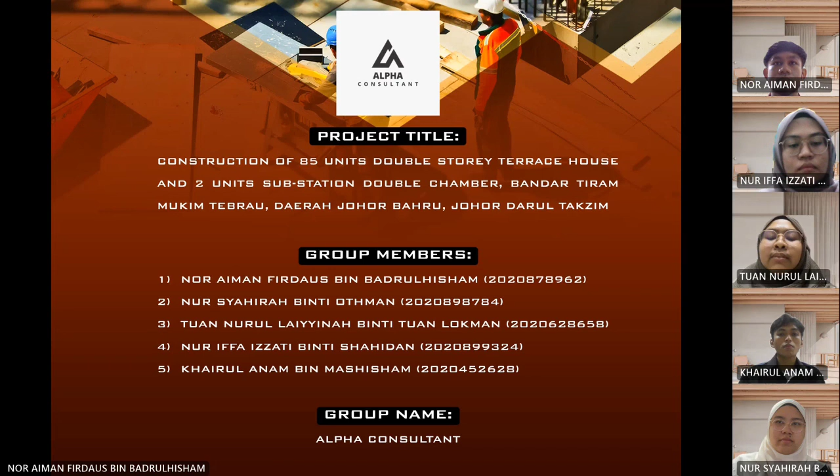Assalamualaikum and very good morning. We start with the project background. This environmental impact assessment is prepared for construction of 85 unit double-story terrace house at Bandar Tiram, Mukim Tebrau, Daerah Johor Bahru, Johor Darul Takzim. The project consists of major components: 2-story terrace house, 2-story semi-detached house, office shop, and water supply.

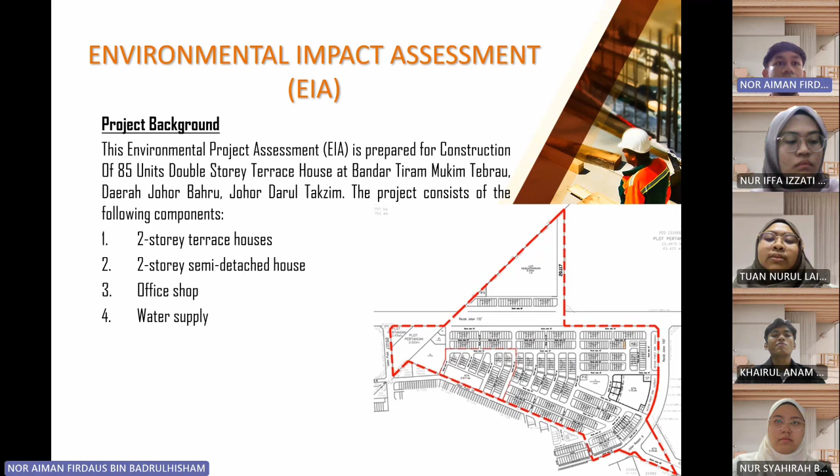The objectives of the project consist of housing solution, space optimization, cost efficiency, structural integrity, aesthetic appeal, functional design, sustainable construction, timely completion, compliance with regulation, and lastly, client satisfaction.

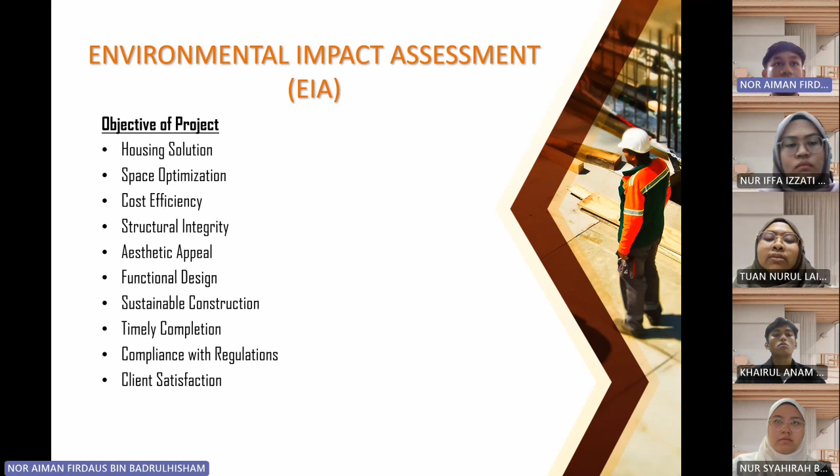For the objectives of the environmental impact assessment: first, to identify the impact of the project on the environment; second, evaluation of significance; third, prediction of cumulative effect; fourth, identification of mitigation measures. Next, consultation and stakeholder engagement, compliance with regulation and standards, monitoring and follow-up, and integration of sustainability principles.

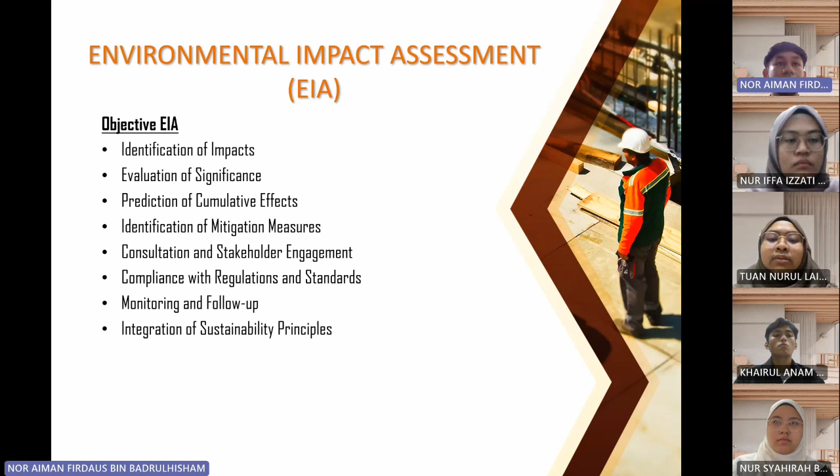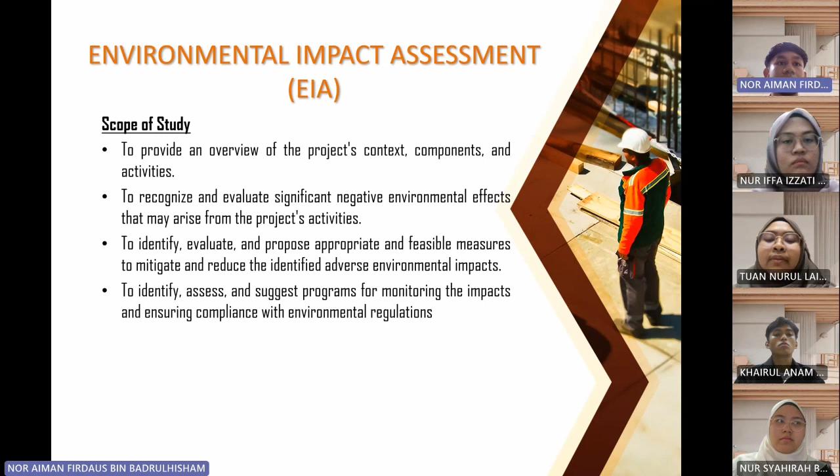We go to scope of study. First, to provide an overview of the project context, components, and activities. To recognize and evaluate significant negative environmental effects that may arise from the project activity. To identify, evaluate, and propose appropriate and feasible measures to mitigate and reduce identified adverse environmental impact. To identify, assess, and suggest a program for monitoring the impact and ensuring compliance with environmental regulation.

For the project details, permanent and temporary structure and infrastructure development: first, access highway will be widened and rehabilitated; second, during construction, a temporary work shelter, toilet, septic tank, project office, and storage room will be built at the project site.

The major components of this project: two-story terrace house, 85 units; two-story semi-detached house, 4 units; 3-story office shop, 129 units; water supply, 3 units; and playground, 1 unit.

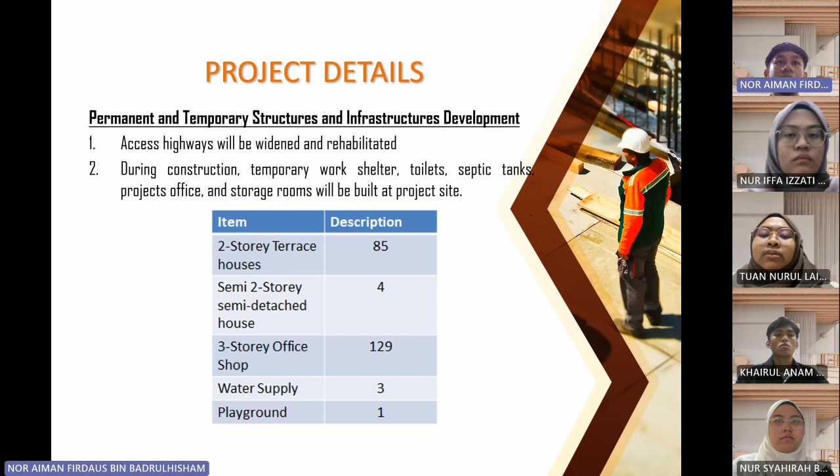For the location of the project, which is at Mukim Tebrau within the Johor Bahru district, approximately 25 km away from Bandar Johor Bahru. The access to the site can be obtained via Jalan Kota Tinggi and Jalan Sungai.

Additionally, when travelling from Kulai to Ulu Tiram, there is an oil palm area located on the left side of the road, approximately 8 km from Ulu Tiram. The local authority involved is the Municipal Council of Johor Bahru.

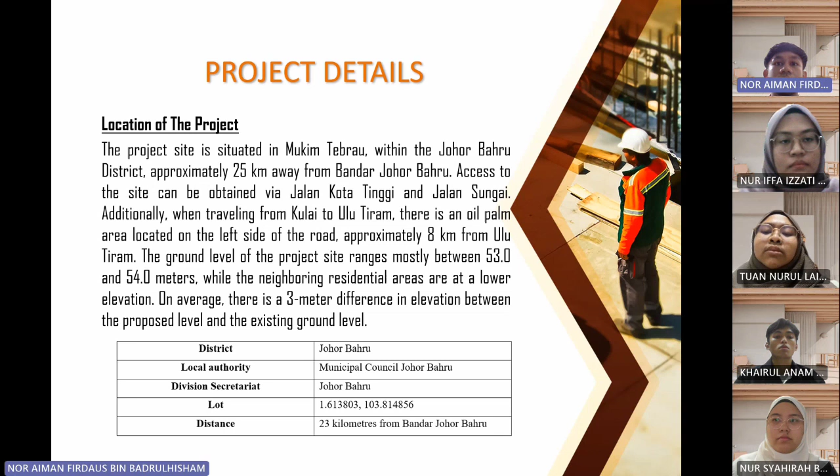We continue to project description by Syahirah. Assalamualaikum warahmatullahi wabarakatuh, and a very good morning to our panel and madam. My name is Nur Syahirah binti Othman. I will continue from Aiman.

This is site accessibility. In the planning of a site, accessibility is a crucial consideration. A good accessibility strategy can help avoid equipment conflicts and ensure seamless transit throughout the project. It can also ensure enough space for all worksite equipment such as trucks, cranes, and excavators to function safely. Conflicts are typically brought about by erroneous estimation of the amount of space taken by facilities and equipment.

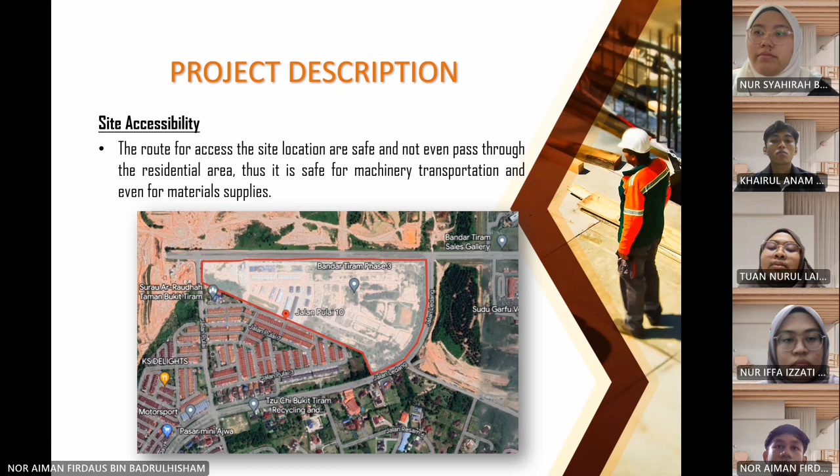As you can see, the roads for accessing the site location are safe and do not even pass through the residential area. So it is safe for machinery transportation and even for material supplies.

Infrastructure and utilities: first, electricity, we have TNB, Tenaga Nasional Berhad. Second, water supply, Ranhill SAJ Sdn Berhad, distributed by Rumah Pam from nearby residential areas. Third, communication, there is Maxis, Celcom, and Digi coverage. Fourth, roads, SDA and residential roads. SDE stands for Senai Desaru Expressway.

Fifth, schools and education institutions, there are a lot of educational buildings within a 5 kilometer radius of the project site. Sixth, mosques and places of worship, it is complete with various religions for all types of races; there are mosques for Islam, and also facilities for Buddhists and Hindus. Lastly, public departments, there are firefighters, police station, polyclinic, and post office.

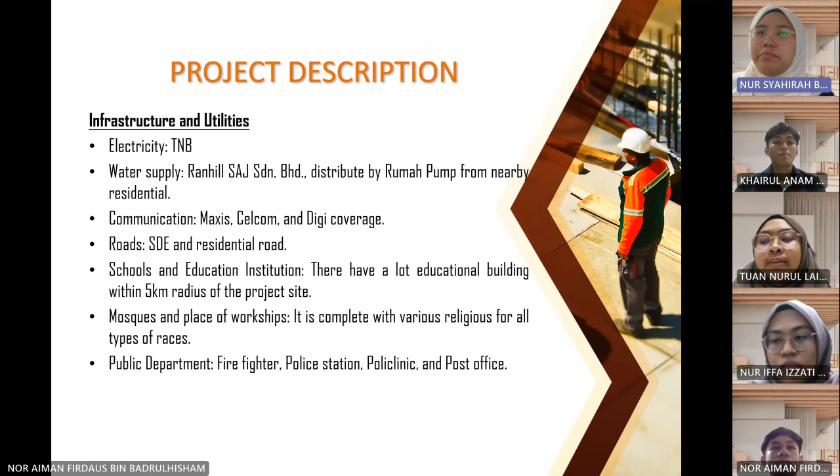Next slide. Project activity phase. There are three phases of activities: first, pre-construction stage; second, construction stage; and third, operational stage.

In pre-construction stage: first, plan preparation and seeking approval from the relevant authorities. Second, appraisal of baseline conditions to determine supply and demand for required infrastructural utility services. Third, EIA project report and study report preparation, including the necessary approval.

In construction stage: first, transportation of machinery; second, transportation of building materials; third, drilling boreholes; fourth, excavation and land filling works; fifth, masonry, concrete work and related activities; and sixth, structural steel works.

In operational stage, there are residential activities, solid waste and wastewater management, compound cleaning, and lastly general repairs and maintenance. All construction inputs have to be obtained from licensed dealers, such as construction tools, machinery, materials, infrastructure elements, and others.

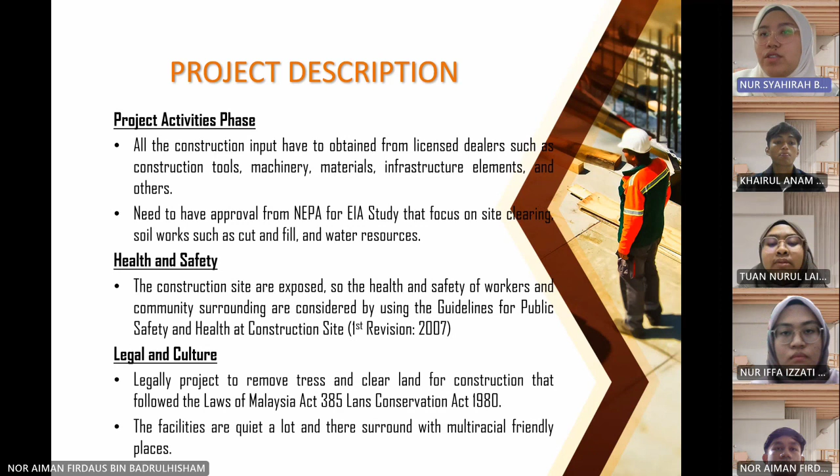Hi, my name is Tuan Nurul Laina. I will continue from Syahirah. For existing environment, there are three factors under environment, which are physical, biological, and socio-economic.

For the first, physical environment: there are some impacts affecting the environment for this project. First is land use and habitat destruction, where clearing is done at each stage and temporary roads and infrastructure are built. Bulldozers, excavators, and trucks are utilized to clear the site. This affects land use through biodiversity loss, fragmentation of habitat, and soil degradation.

Next is temperature and precipitation, where implications include rising temperatures, changing precipitation patterns, and extreme weather occurrences that have the potential to influence ecosystems, water resources, agriculture, and human settlements.

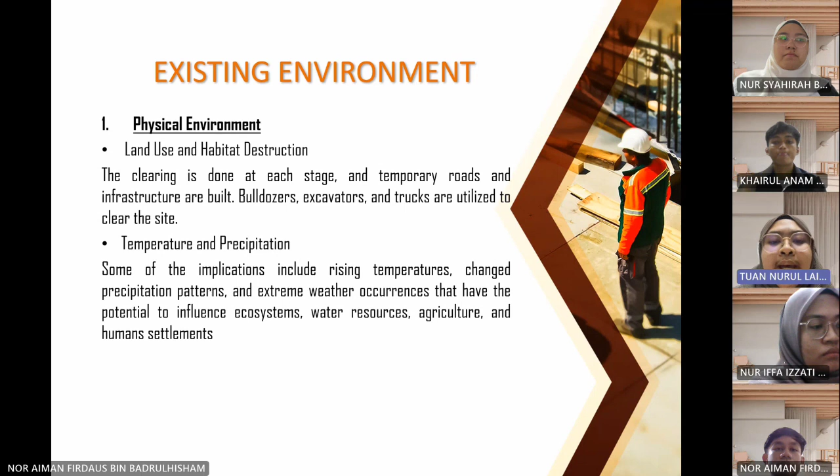Next, for biological environment, there are two impacts: flora and fauna. For flora, there will be vegetation removal within cleared areas for access roads and utility sites, with loss of tree cover, and the function of protecting the soil, particularly on steep terrain, will be lost. For fauna, the majority of birds and mammals are lowland species with moderate conservation significance that are well suited to disturbed rural habitat. Contractors or other involved parties need to consider this environmental impact.

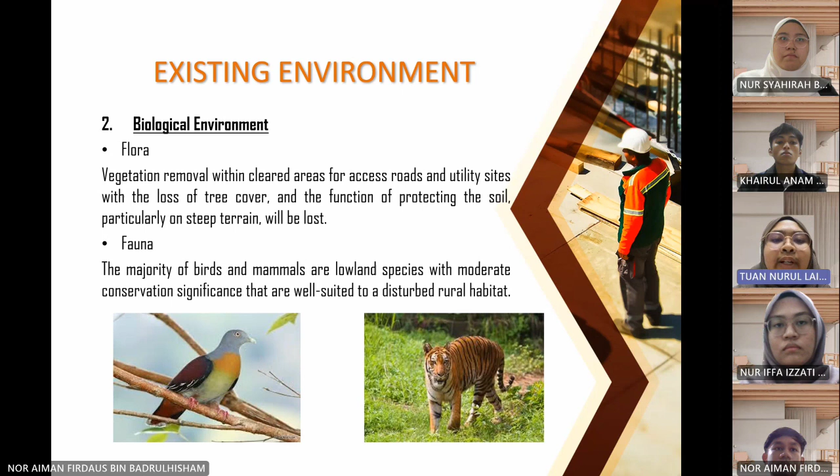Next, for socio-economic, there are three impacts. First is noise environment. The noise environment can vary greatly depending on location, time of day, and the many noise sources present.

Next is air quality. Land clearing and earthwork increase traffic activity, and construction-related emissions, primarily suspended particulate matter, all have an impact on air quality. The last one is water quality: the assessment and simulation of water quality in the Sungai Johor Basin as a result of pollution sources caused by urbanization.

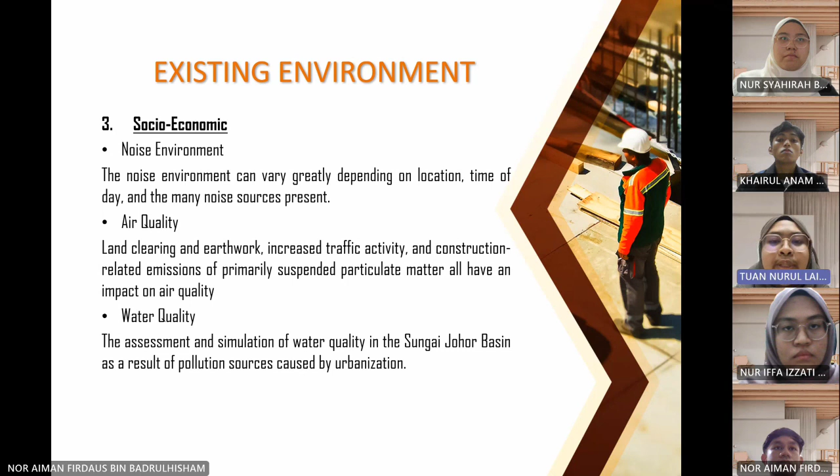Hi, my name is Nur Iffa Izzati binti Syahidan, and I will present about the mitigation measures. There are three phases for this mitigation measure: pre-construction, during construction, and post-construction.

Pre-construction phase, activity 1: land and soil. The potential impact of this activity is construction and operation causing habitat damage, land disturbance, and soil erosion. The mitigation measures are using erosion prevention techniques including stabilizing slopes, and applying methods to stop soil erosion such as retaining walls or geotextiles. The monitoring program is soil erosion management.

For the second activity, biodiversity and ecosystem: the potential impact is fragmentation, habitat loss, and disruption of nearby biodiversity and ecosystem. The mitigation measures are to conduct biodiversity surveys to find species and habitats that need protection, and create a strategy to maintain biodiversity. The monitoring program for this activity is ecological baseline assessment.

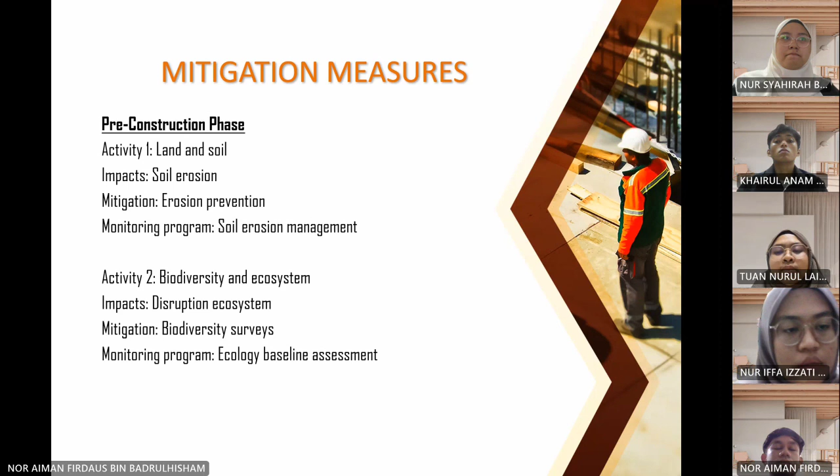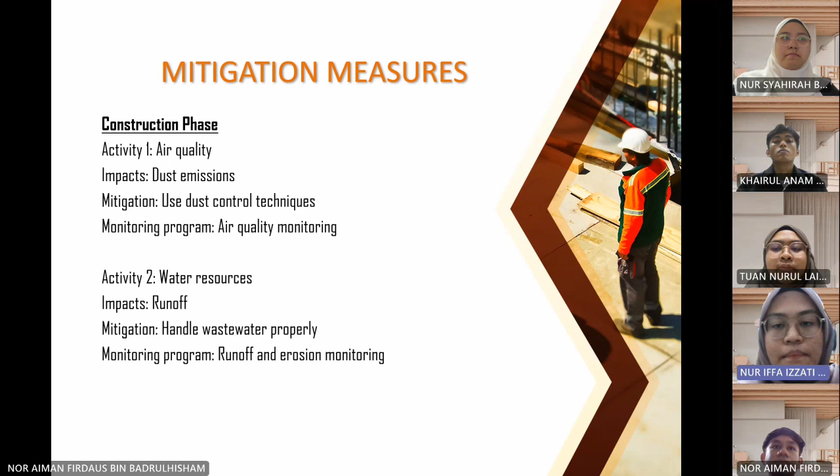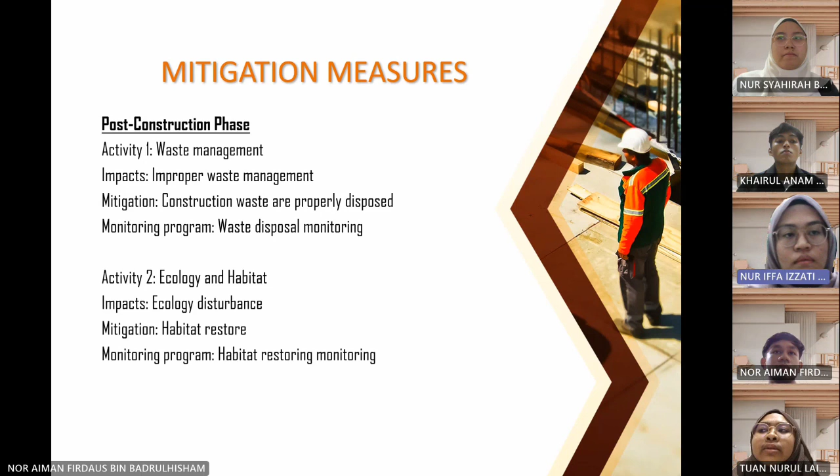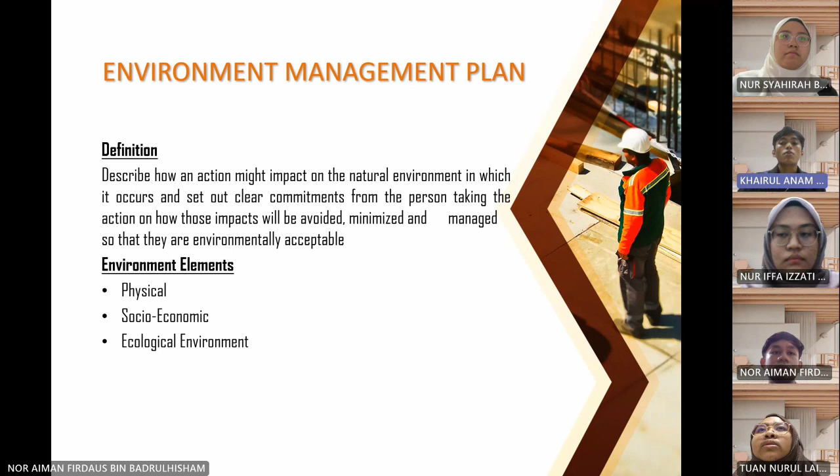So for the definition, it describes how an action might impact the natural environment in which it occurs, and sets out clear commitments from the person taking the action on how those impacts will be avoided, minimized, and managed so that they are environmentally acceptable. In this environment management plan, there are 3 elements: physical, in terms of animal and plant habitats; socioeconomic, on how community development impacts the environment; and lastly ecological environment, meaning living and non-living things and how they affect the environment management plan.

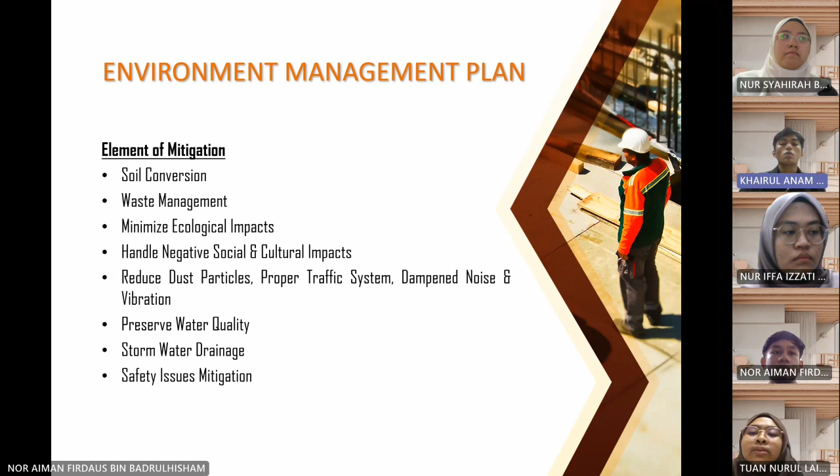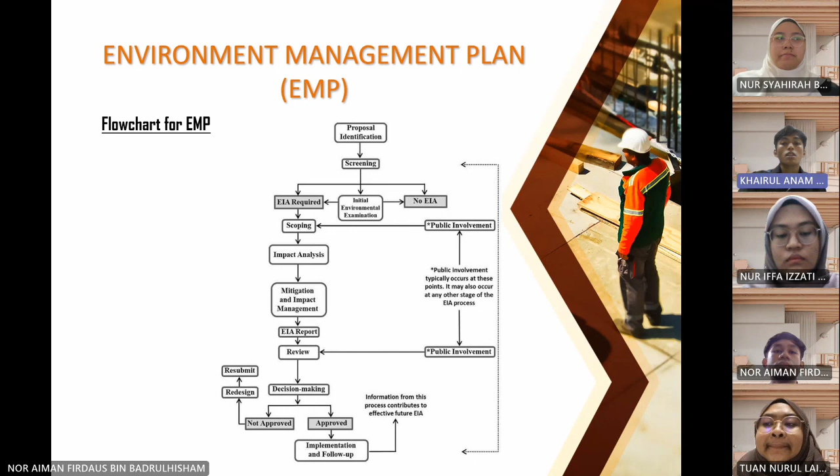So if the EIA report is approved, the implementation and follow-up can be done through this report. But if it is not approved, then the EIA report must be redesigned and resubmitted for retrial.

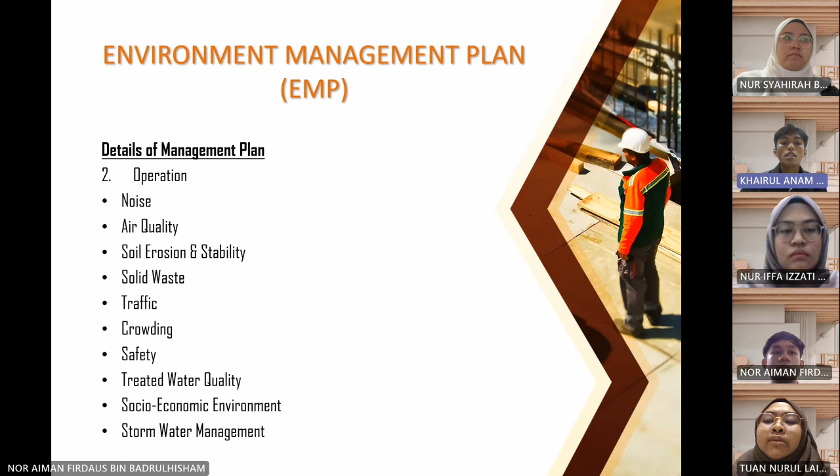However, note that there are 2 extra elements, which are treated water quality and stormwater management.

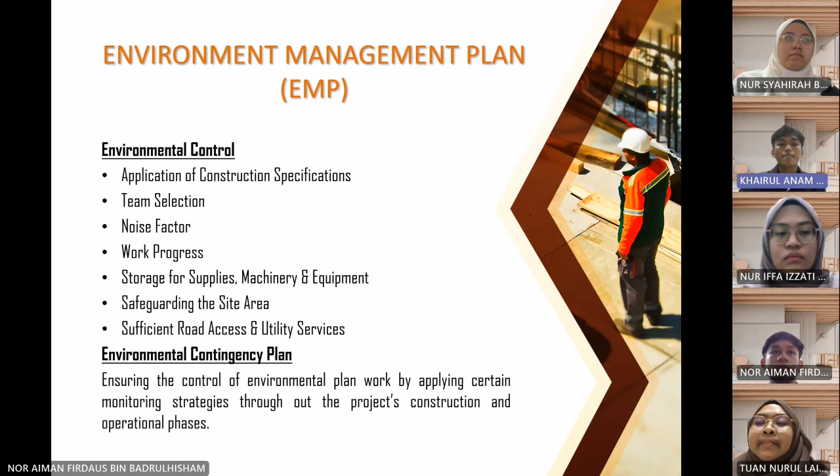So that is about the environmental management plan. Now we move into the conclusion and recommendation. From this EIA slide representation, we want to highlight the key findings and factors of the mitigation aspect. These are the construction projects we want to do while minimizing the negative effects on the current surrounding environment. At the same time, we want to preserve the natural habitats of animals and plants so that the longevity of coexistence with the human species will be preserved.

So in this, the EIA report can negate the harm of construction activity and reduce the impact it can have on the environment, whether directly or indirectly. Lastly, from this report, we can conclude that our project can be categorized as a safe project due to the evidence we have concluded in this report, reflecting the well-being of the surrounding environment.